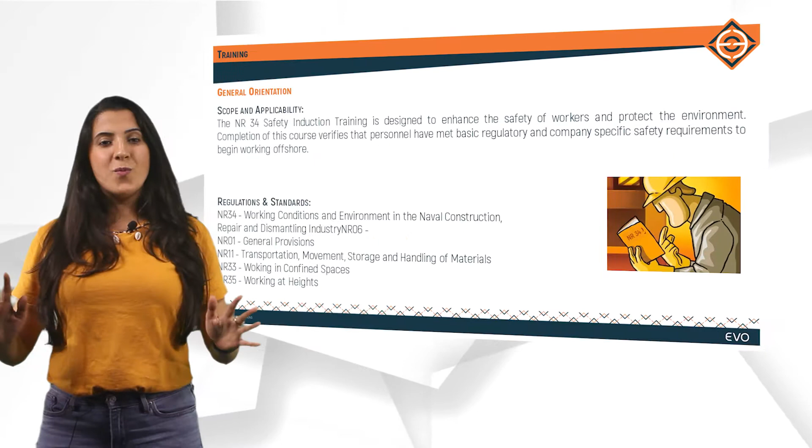The scope and applicability of the NR34 Safety Induction Training is designed to enhance the safety of workers and protect the environment. The completion of this course verifies that personnel have met basic regulatory and company-specific safety requirements to be able to work offshore. Although this training is a requirement of the NR34, we also comment on other regulatory standards, such as the NR33 for confined space, NR11 for cargo handling, and so on.

Here we can see the course content. We will see the risk inherent to the activity. This means all the activities that are usually held on board, the conditions and the work environment, like the environment protection, and the protective equipment, like the collective and the emergency equipment available for us on board.

And with that, the objective of this training is to qualify the student for tasks on board the unit, provided by NR34 and related standards, granting familiarization knowledge about safe procedures at the offshore units. After completing all the activities in this course and reaching the statutory average for approval, you'll be able to have your certificate that will be valid for 1 year.

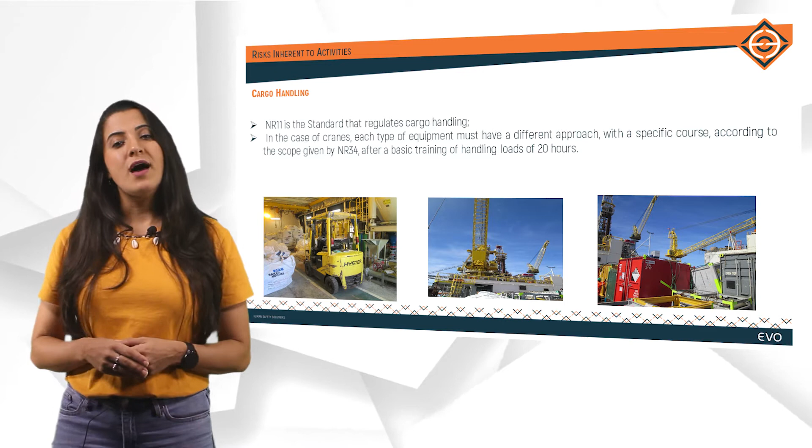The specific regulatory standard for cargo handling in Brazil is the NR11, which established that for each type of equipment, a specific training of 20 hours must be applied. In the case of cranes, each type of equipment must have a different approach, with a specific course, according to the scope given by NR34, after a basic training of cargo handling, also of 20 hours.

There are a number of good practices to ensure safety during cargo handling. Therefore, workers should know the relevant types of offshore cranes and their construction, so they really know how to differentiate the features of each crane, and thereby be able to select the right lift equipment for the job. Know the safety aspects and reasons for accidents related to the operation with offshore cranes.

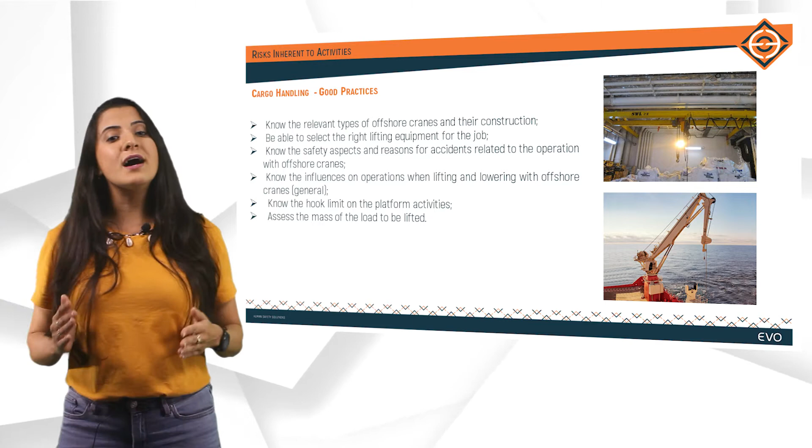Know the general influence on operations when lifting and lowering with offshore cranes. Know the hook limit on the platform activities, and know how to assess the mass of the load to be lifted. All this the operator learns in the cargo handling training, which must have a practical assessment.

So there are some risks inherent to offshore crane operations that should be highlighted, such as the movement of the vessels, or swing. That is, the constant movement of the vessel makes it difficult to ensure that the crane is centered in relation to the load. This difference generates a pendulum movement that can cause violent collisions. There are several videos available on the internet that illustrate this phenomenon.

Another critical risk is the chance that the steel cable may break. It can be caused by dynamic loading, by shear due to the axial force combined with the perpendicular compression of the cable, or maybe due to the expiration of the service life and also poor operation of the crane.

Weather conditions. Here there are factors such as wind direction, waves, sea current, and reduced operator visibility, maybe due to the sunlight in his eyes, for example. These factors are added to the already mentioned load displacement in relation to the crane and increase the swing effect.

According to NR34, the cargo handling operation must be stopped in adverse weather conditions and must be stopped as well in poor lighting. We know that the wind can cause a lateral force and force the crane boom to exceed the safe working limits, so we should learn the maximum wind speed to operate safely, and we must stop lifting operations if the wind poses any danger.

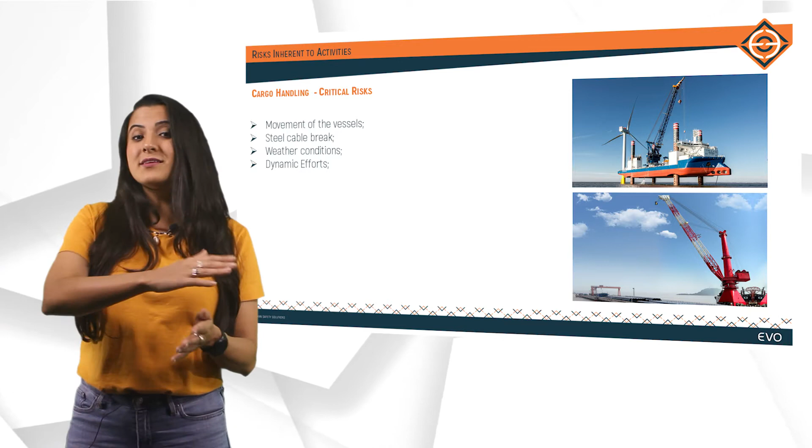These dynamic efforts are efforts like wind, like bumps that the load undergoes, and especially the effort against gravity. The higher the lifting speed, the greater the effort required. That is why the effective sling capacity must always be respected.

As for every task, planning is a critical point. The barriers must be in place to prevent personnel from being near or underneath the suspended load. The communication method must be available and must be tested.

We should verify that simultaneous operations are compatible, if lifting devices are suitable and are being used according to the manufacturer's instructions for use, and if the landing area can accommodate the cargo in terms of size and weight.

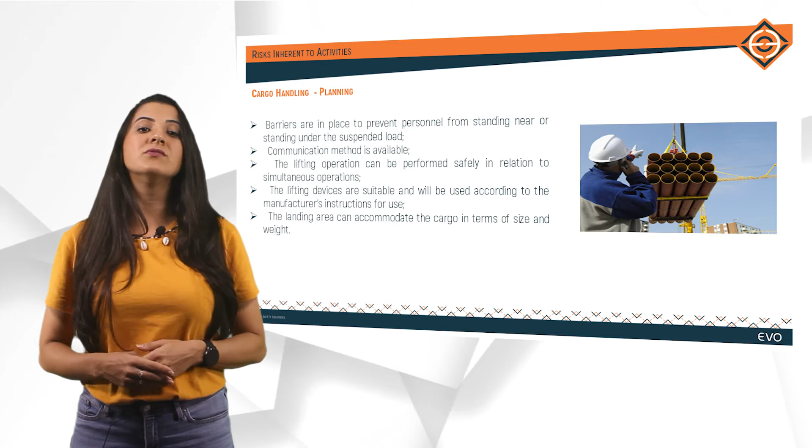All facilities must have dedicated areas where lifting equipment that is not in use must be stored. We must be careful with this equipment and not leave it exposed to the sun and other harmful environmental conditions. To ensure control, an updated record must be kept of the lifting equipment.

Pre-inspection is a fundamental step for an activity, mainly those of cargo handling and working at height. The user must inspect the equipment before and after use, and the user is also responsible for returning the lift equipment to the storage area after use.

It is important that damaged equipment must be marked and reserved in a designated place, clearly identified for this purpose. The reason for this, I believe, is very clear.

Many companies nowadays use a color code. That's basically identification, normally by painting, carried out with the purpose of visually identifying that the equipment or the accessory of cargo handling has passed inspection and has been approved for use.

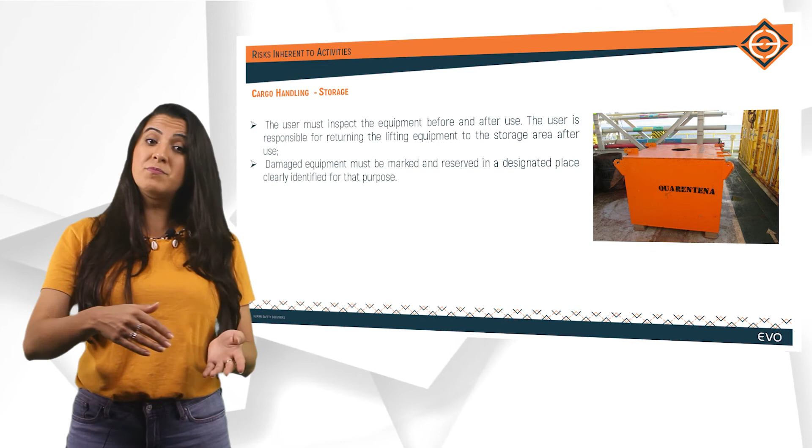In the company that I work for today, we consider, for example, black for equipment and materials to be disposed of. And for all the defective cargo handling equipment and accessories with an expired certificate or without certification, we must paint in red color and remove them from use until they are inspected and approved for use by a specialized company.

When the load is lifted in the most upright position, the compression effort is evenly distributed over the entire surface of the vertebra and discs. So in this position, most upright, it is possible to reduce the compression on the disc by about 20% compared to lifting in a curved position.

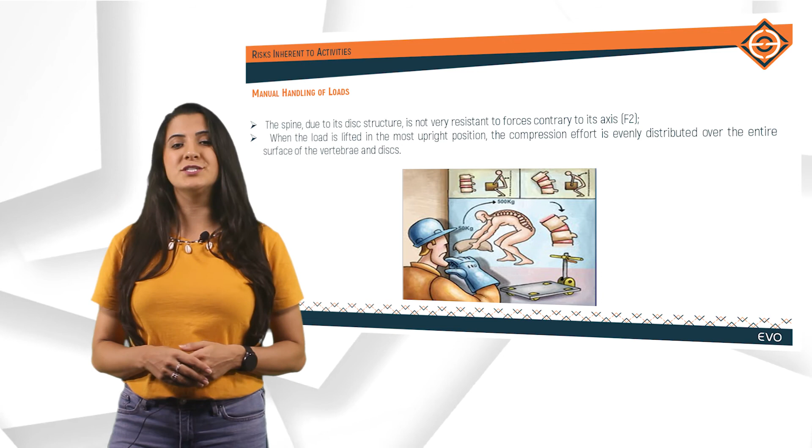So how should we transport loads? Just like a kid of 1 to 3 years old. If you have a son, a nephew or a niece at home at this age, notice that the kid squats with its back straight and carries the load keeping the back in line. Why do we lose this posture?

Whenever possible, we should use transport equipment, preferably with wheels, avoid carrying weight with one hand, use body movement in favor of movement, analyze the path, and always try to pass through hard and level floor.

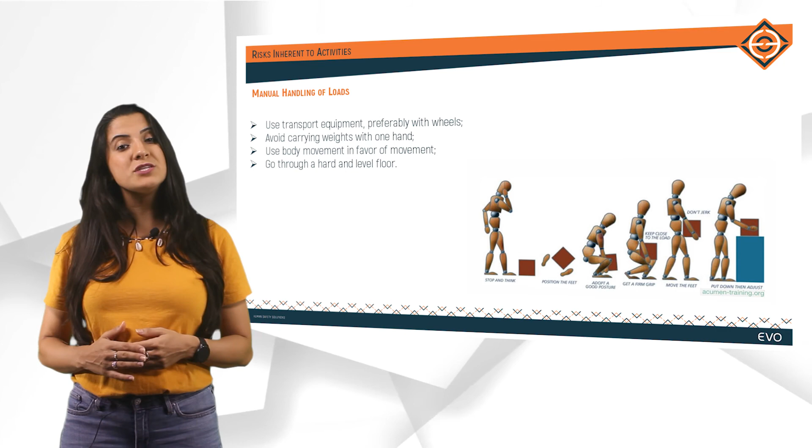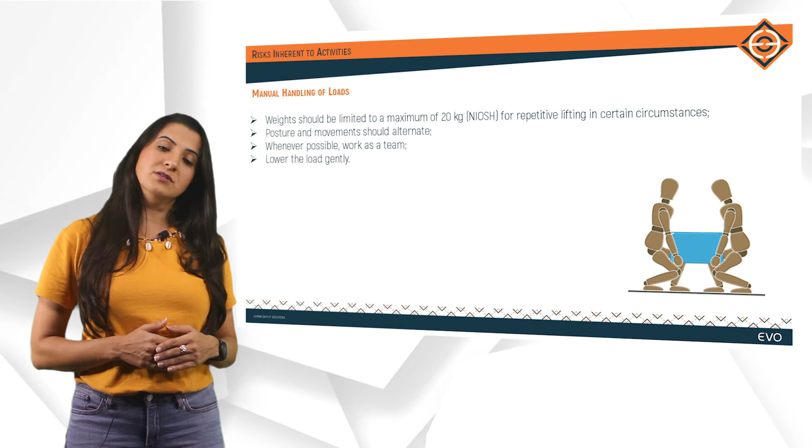According to data from NIOSH, the US federal agency responsible for conducting research and producing recommendations for the prevention of work-related injuries and illness, lifting weight should be limited to a maximum of 20 kilos for repetitive lifting in certain circumstances. The posture and movement should be alternated, and whenever possible, you should work as a team, and the load should be lowered gently on the floor.

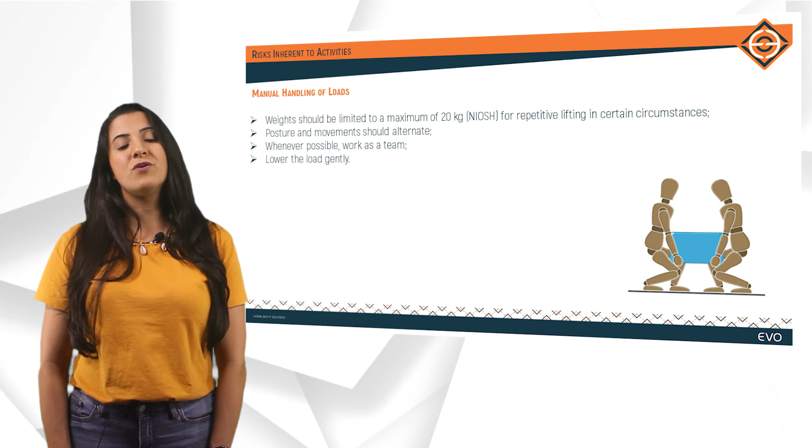And we have finished the first part of this initial module. See you at the second part.